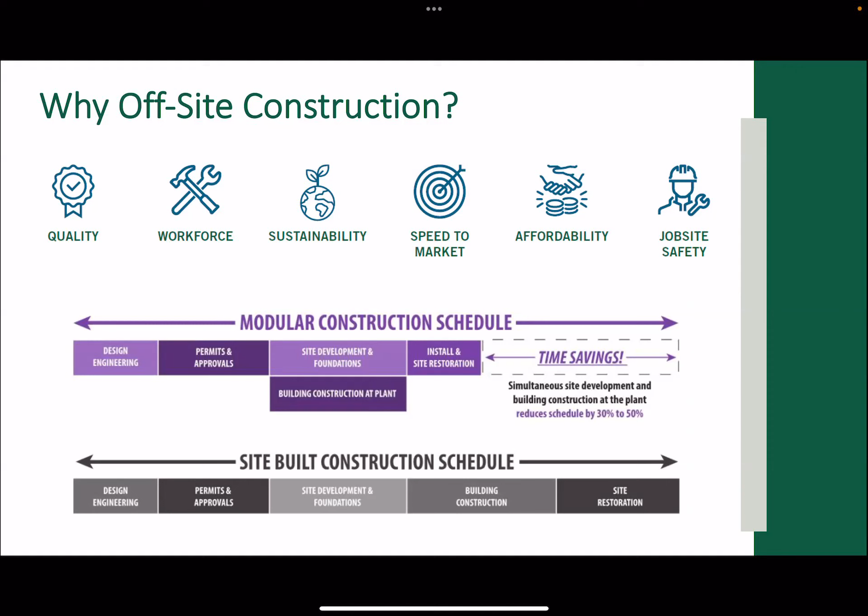Because of the extreme challenges around housing affordability, offsite construction has really captured the eye of policymakers. In the U.S., the Biden administration announced its housing action plan, and really looked to modular, panelized, and manufactured housing as a solution to address a lot of the affordability challenges, for many of the reasons we just talked about.

We've also seen some work with the Department of Housing and Urban Development. Just a couple weeks ago, they released an offsite research roadmap, looking at where investments and activities in the offsite construction space would be most valuable.

From the perspective of the International Code Council, the regulatory and policy environment and standards and system performance are certainly key to that, but really recognizing that offsite construction and the housing industry as a whole works in this ecosystem, tied to finance and insurance, the project delivery process, the workforce, and the overall economics of the industry. But if we think about offsite construction as this integrated process that really drives towards more holistic solutions, the interconnectedness and needs across all of these areas becomes even more critical.

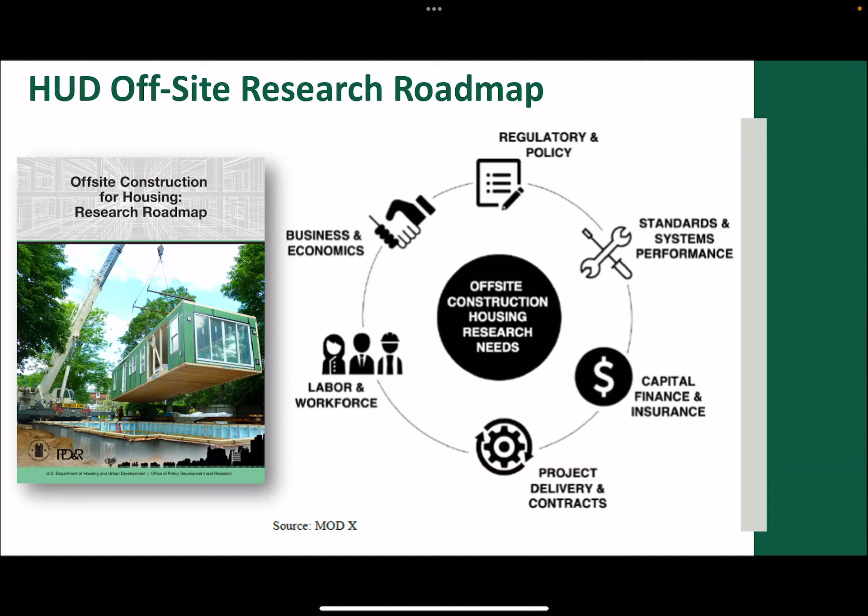So certainly some interesting perspectives there. We'll talk a little bit about it, but I think the North American perspective around disaster resilience is certainly not as strong as it is here in Japan, but I think it's certainly an opportunity that we should all really look to help support advancements in the building industry, in community resilience. So certainly happy to pick up that conversation as well.

And then certainly I didn't want to leave out the Canadian perspective. The Canada Mortgage and Housing Corporation just issued a $1 billion initiative to increase affordable housing, and really the initiative focuses on modular housing as the solution. So that $1 billion is really focused on construction using modular housing. CMHC has certainly recognized the benefits of offsite.

So, taking a step back, I think it's helpful to talk about what we mean by offsite construction, what are some of the challenges and barriers, and maybe how do we need to think a little bit differently to really take advantage of the benefits that offsite construction provides.

And so, if we think about traditional site-built construction, the local code official, if they wanted to, they could show up to the job site every day, see progress, poke behind the walls, know what's going on.

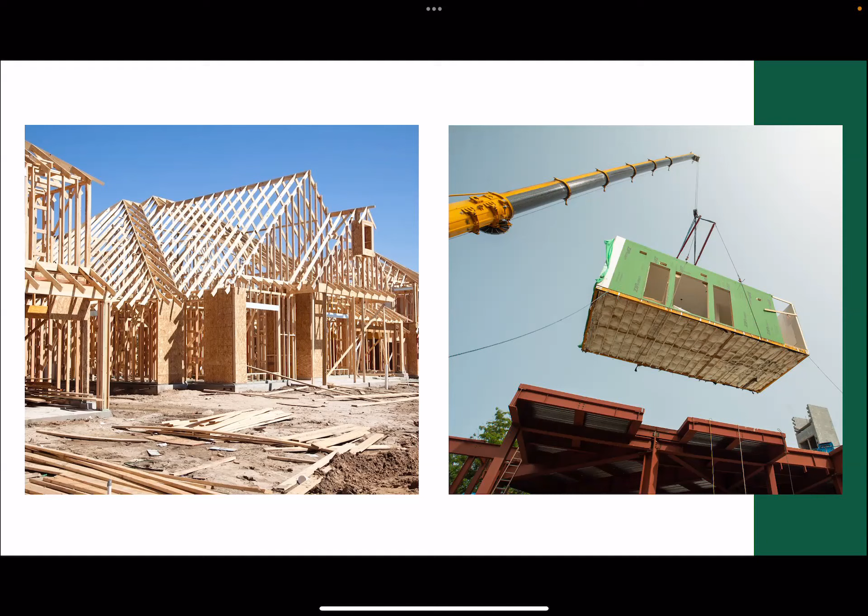And so it creates a different type of regulatory environment. I think from the ICC perspective, and I believe this is generally the case in Canada as well, regardless of which process you choose, the underlying performance requirements are the same. It still needs to comply with the building code in place in the jurisdiction where that project is finally resting. And so we really need to rethink what that process for verifying that compliance really looks like.

And that leads to a discussion around what do we mean when we talk about offsite construction. There's certainly a few different flavors. Generally, we think about it from the regulatory perspective as open construction or closed construction.

Open construction is, whatever shows up to the job site, the inspector can really see what's happening. You haven't closed the walls, you haven't covered any of the connections, any of that. So it's not a terribly different process for the local code official.

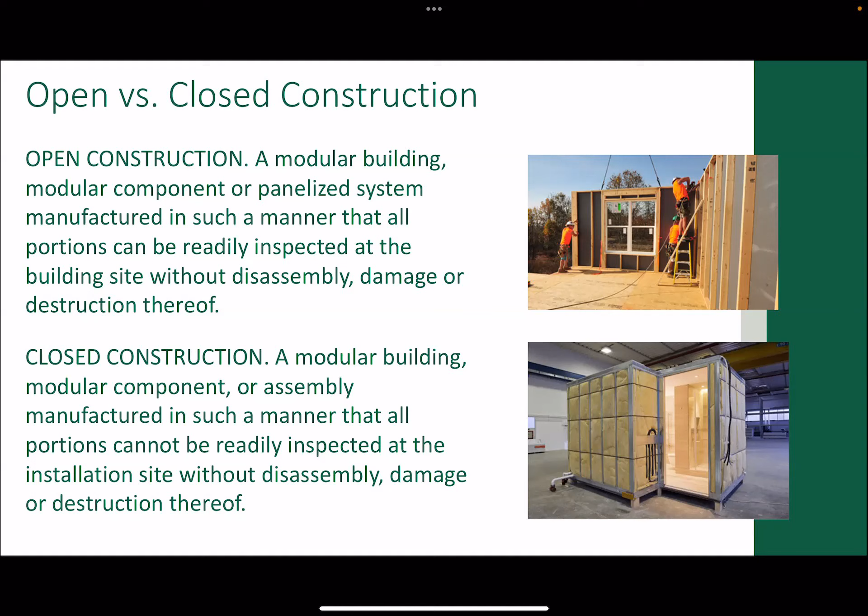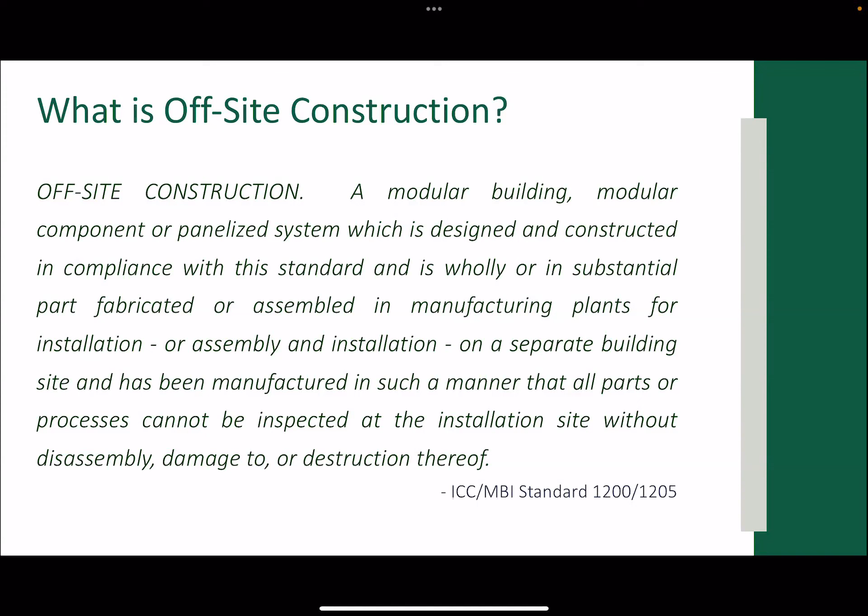And so capturing that definition of what do we mean by offsite construction - this is the definition that we've established in a couple standards that we've developed in this space, and I'll cover those in a minute. But really talking about the factory setting itself, and the closed construction aspects of that building component or panel. And so that should give you a pretty good perspective of what we mean by offsite.

We've seen multiple different approaches to offsite construction, and if we think about that definition, all of these could fit that definition. So everything from tiny houses to residential construction, panelized systems, commercial buildings, shipping containers - which we've seen a lot of activity in that space - bathroom pods, kitchen pods as well.

And we're seeing these strategies be used in a wide variety of settings. So single family, multifamily, hospitality, hotels, hospitals, retail, clinics, office buildings, schools. So it really presents an opportunity throughout the building industry.

So I mentioned a little bit about the manufacturing process, but it's really about working a staged approach down an assembly line. So working through the construction process in a closed setting, which provides some significant opportunities on the quality side and on the workforce side.

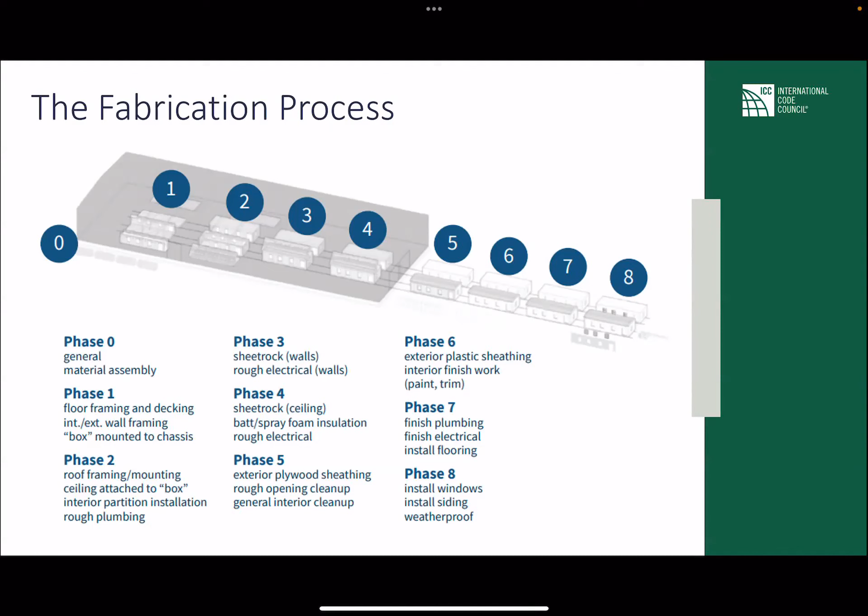Next I'm going to touch on a few specific opportunities, maybe a little bit more focused on some of the resilience aspects that offsite construction provides.

This is actually a study that the Texas General Land Office did - they're continuing to do some follow-up work, but really thinking about opportunities for rapid deployment of housing after a disaster. They looked at, I guess, 7 different types of solutions, everything from 3D printing to log kit, to modular foldable units, panelized systems, shipping containers, kit homes, and seeing how many of these would fall within that offsite construction definition.

How these could be deployed in a disaster recovery situation quickly is really one of those key aspects to the resilience of individuals that were affected by a disaster. But if you also think about the community resilience aspects, keeping people within that community, assuring that the housing stock, which supports businesses in that community, can really remain functional, is important.

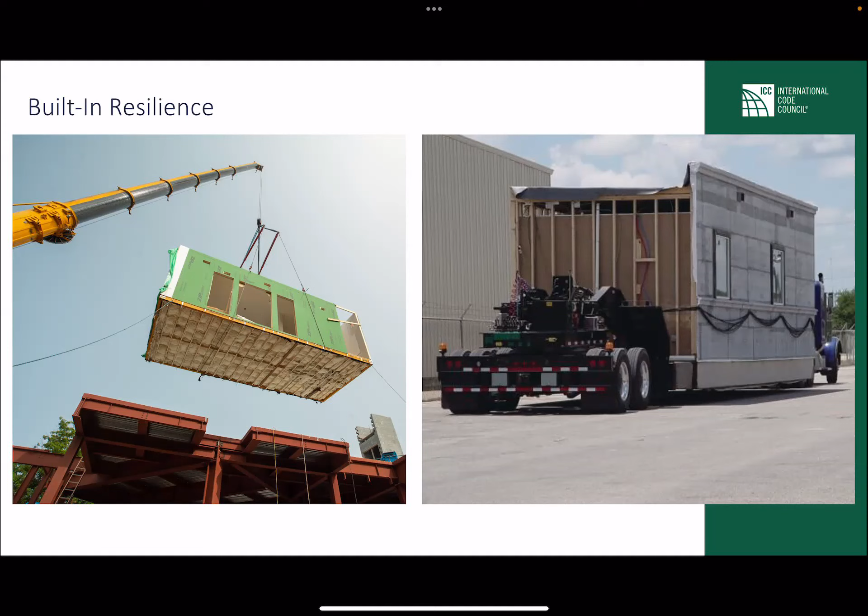I think the other piece that we really need to think about as a building industry is, particularly relative to climate change, the mitigation of climate. And I know the challenges within the disaster community of climate mitigation versus climate adaptation, and the hazard community uses mitigation from the other perspective, where adaptation means mitigation, and that's always fun.

But thinking about that feedback loop, and being able to identify the sustainability benefits and the contribution of modular construction to reducing those impacts from future hazard events. There's been a few studies, mostly at a project level basis, but out of the UK, a couple modular construction projects showed 45% less carbon intensive, and that certainly leads to broader resilience as well. So I think we'll continue to see more studies in this space, building this piece of the pie even further.

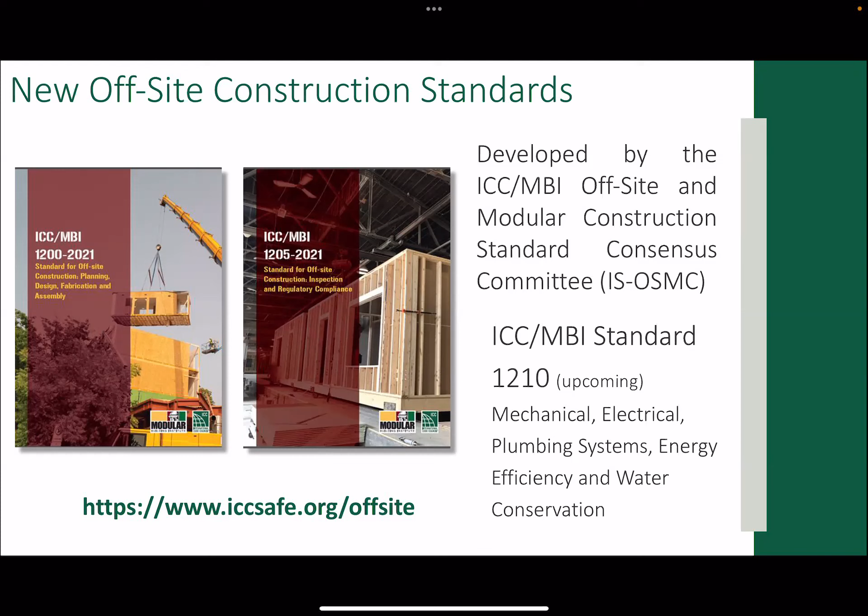And so, particularly looking at what are the opportunities that the factory setting really provides to support enhancements in energy efficiency and water conservation. And so, diving into the specifics of 1200 and 1205, they really work together to sort of build out that approach to offsite construction.

And so 1200 covers the planning, design, fabrication, and assembly process. So, what's the role of architects, engineers, manufacturers, fabricators, transporters on the offsite construction process itself? And then 1205 covers the inspection and regulatory compliance process. So, what are the sort of state and local requirements? Offsite construction often relies on third-party plan review and inspection agencies, which are in the factory doing the inspections.

And if we think about the offsite construction process, the factory can be hundreds or even thousands of miles away from the final building site. And so it's just really not efficient for a local code official to go to a factory that's far away. And so having that third-party process really helps. And then you also have the added benefit of a third-party industry that sees offsite construction on a daily basis and knows how that process works, knows what to look for, where a local code official really wouldn't have that opportunity, that access, that experience.

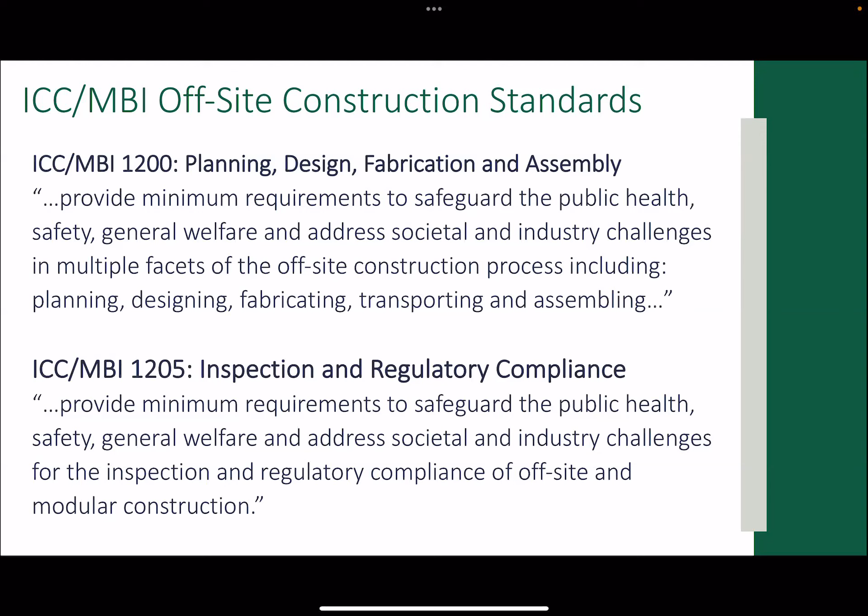And so, building off of the standards to really help drive the process around offsite construction, the education of the industry, and particularly code officials, is really important to ensure that the offsite construction process is working efficiently. And so we've really worked hard to develop a variety of resources that address the industry, that address code officials, to really help move things forward.